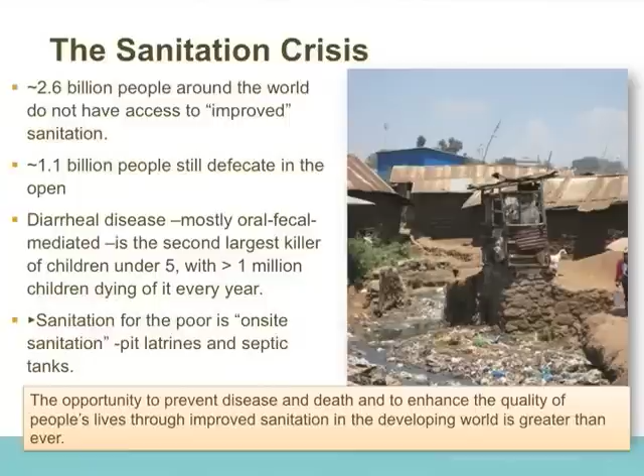So the sanitation crisis, bottom line is about 2.6 billion people around the world. There's 7 billion people in the world at the moment. 2.6 billion don't have access to safe hygiene. When we talk about safe hygiene, do I have a laser pointer here? There. This is a pit latrine. And this is the disposal mechanism for that pit latrine. Out of those 2.6 billion people, about 1.1 billion people still open defecate. That means they go find a bush and they'll go take a crap behind a bush. Okay? Sorry, I'm not going to be nice about my words here. This is how it works. So the opportunity to actually prevent disease and death through affecting sanitation on a global scale is huge.

The foundation, effectively, within our group, what we're looking at is the safe and affordable sanitation within these low-income groups. Key there is affordable. And part of the term of affordable is that we have to look at this as a business proposition. In our water sanitation group, we have 3 functions. I'm not really going to talk about the delivery models at scale, which are the change behavioral management, tends to be more rurally focused. Policy and advocacy here is where we try and influence the local governments and the major governments to actually put in good sanitation policies. Because I'm the technology guy, I get to talk about sanitation and technology, and it says tech here, so we're going to talk about that.

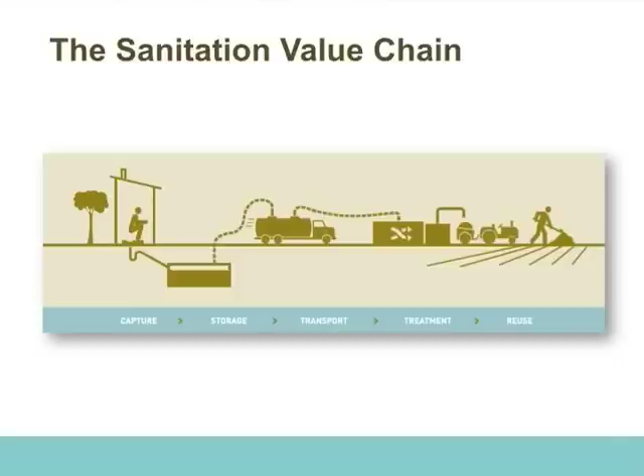Here's the sanitation value chain as we see it. And this effectively is the Reinvent the Toilet program. There is a challenge, which Bill Gates gave us, I'll talk about that in a second. Within the sanitation value chain in the developing country, you've got a latrine if you're lucky. And if you're lucky, that latrine goes to a pit where you can store your fecal material. If you're lucky, someone will come along and take that material out of the pit, and if you're really lucky, they won't drive around the corner of your house and drop it off. They'll actually take it to a location where they can process it. And if you're lucky where they process it, they do it correctly. Okay? So what I'm going to do here is talk through this sanitation value chain and what currently happens at the moment, and then we'll talk about what we're trying to do to affect that.

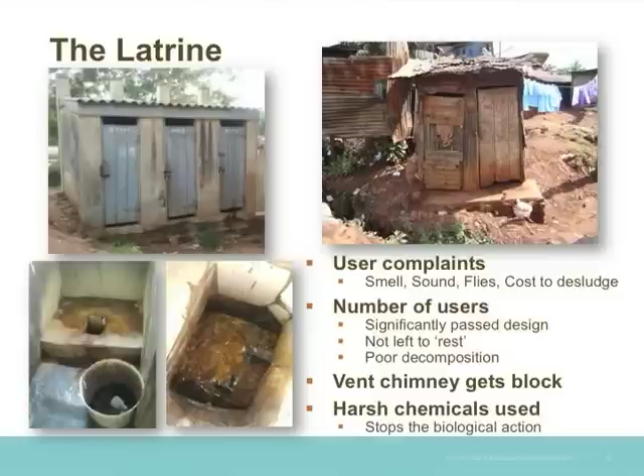The problems we have: smell, sound, flies, cost to desludge. People, when they go to the restroom over there, restroom, what a term, they don't want to smell it. They don't want to see it. They don't want to hear it. And they don't want to hear, or see or smell everybody that went before them. Okay? The cost to desludge, oops, sorry, I went the wrong way. Back, there we go.

There we go. The cost to desludge is around about $30 to $60 a year for an existing pit latrine. This is for people that earn $2 a day, if they're lucky, perhaps $1 a day. So that also means that our business proposition starts capping at $60 a year. Can we do something that reduces that $60 a year to $50 a year? Can we reduce it to $50 a year for a pit disposal? Can we reduce it down to 40? So you can see where the business propositions start to come in.

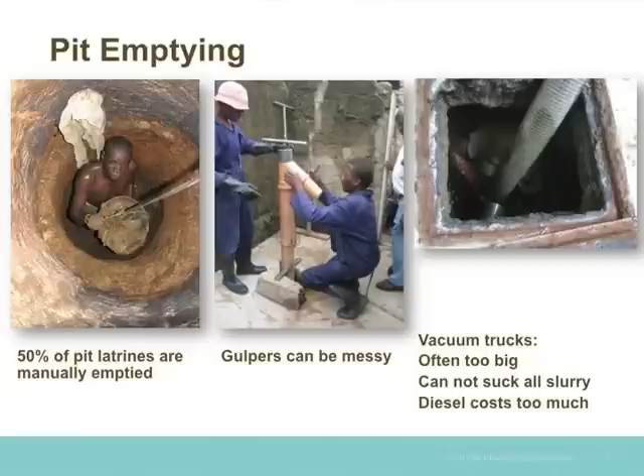Vacuum trucks themselves have the same problem with that. And what you'll actually see if you look carefully, there's a guy down in the pit, even with the vacuum truck, trying to help disturb this layer at the bottom of the pit to be able to pull it out. The other issue you'll find is the trucks are often too big to move up a peri-urban area. So they end up laying a very long pipeline to the pit, which obviously reduces the vacuum pressure as well.

And 80% of pit cleaning out is the cost of the diesel to go from the pit to wherever they're disposing it. And part of that drives the reason why they'll go down the road and they'll just dump it into a natural location rather than to a proper treatment site.

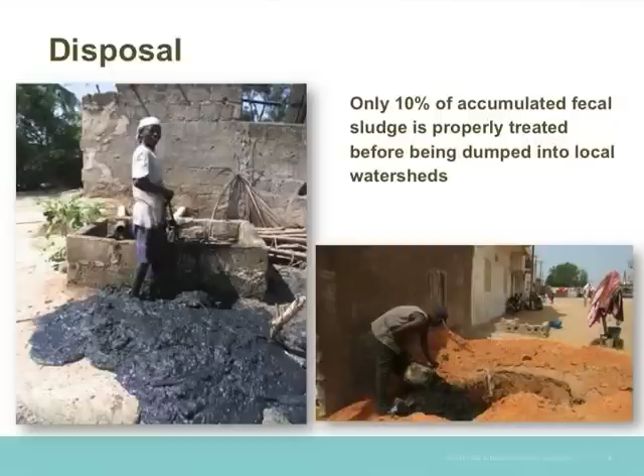Disposal. 10% of accumulated sludge is disposed of correctly in developing countries. Sometimes you'll get the pit and it's just emptied out right by that. In other situations, you'll have people just dig a hole around the side of your house, and that'll be where your fecal material goes. In fact, one situation I know of, they didn't have room in the dense urban area, so they dug a hole in the living room, and then they covered it up again.

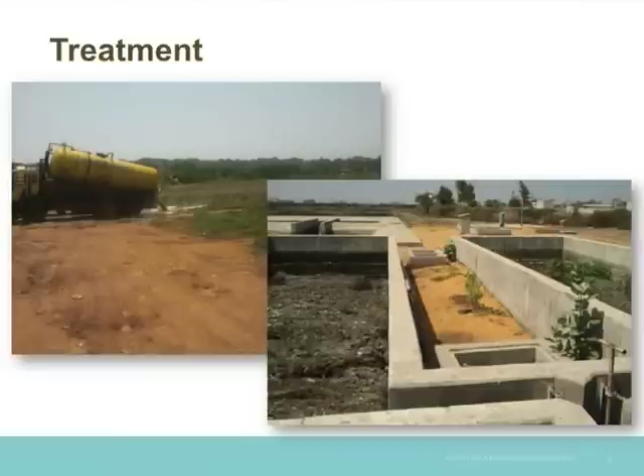We have a treatment system here which is out of Dakar, Senegal. It has some primary treatment. There's some mineral separation. It goes to drying beds at the back. It actually works very well. The problem is, the day I took this picture was halfway through the month and the local utility had run out of money, so nobody turned up to work.

Okay. So how do we do it better? And this is where we come in. First of all, we don't believe in sewer lines. And I think we saw some great numbers showing why we shouldn't believe in sewer lines in this situation. So our goal is to actually expand and improve the existing situation you have, i.e. build up a sanitation network based on what works within that system anyway, and to actually turn that into a business proposition.

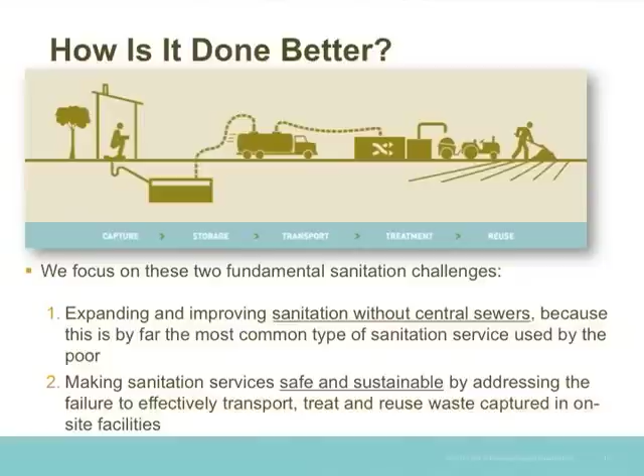When I look at this value chain, I see cottage industries at every single point. So how do we make those cottage industries into a business model, and that business model then drives the sanitation issue for us? From the latrine side, this is actually for the next images that come up. We have a project with the London School of Hygiene and Tropical Medicine.

They're looking at the actual pit latrine, and they've determined what the rate-limiting steps are within the decomposition of the organic matter in the pit latrine. What they're now doing is developing what they would call a biobomb that goes into the pit latrine, that speeds up those rate-limiting steps, and so now you can actually reduce the organic material in the pit latrine.

What that means is, instead of paying $60 a year, perhaps you pay $60 every 5 years. So now we start to see a value proposition there, as long as the additive is lower than the delta on their disposal costs.

More effective designs. In this situation here, basically you defecate on the toilet seat here. There's a valve in there that has a water seal on it. After you've been to the bathroom, you'll kick this little handle here. There's a counterweight that opens a water seal. It drops it into this container here. You would then wash your hands. That's 8 ounces of water that recreates the seal. Okay? That stops the smell, stops the flies.

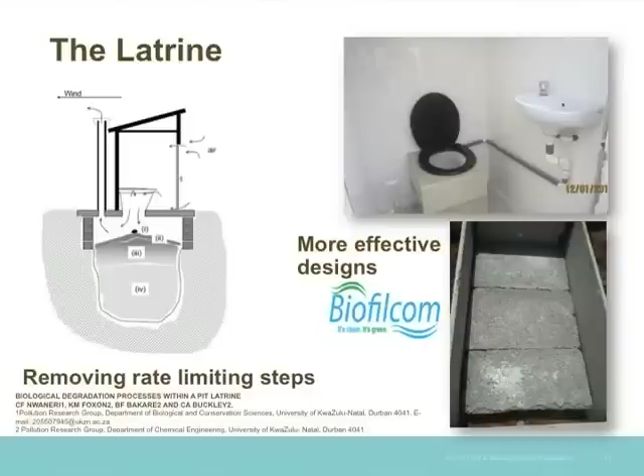Within the actual box here, we have highly porous concrete that allows us to do source separation. The urine drops down. The organic material stays on top. You separate the ammonia from the bacteria. You reduce your smell as well. After about 10 days of installation and use, they put worms in there for vermicomposting. And because it's aerobic, and because you have bugs, roaches, everything else in there, you get about a 90% reduction of the waste in about 6 days.

There's about 2,000 of these units installed across Ghana at the moment. They're about 2 years in operation, then you have to empty them out. It goes straight onto the garden. The longest one that's been installed is 6 years. It's still working fine. Okay? So it goes again to what we were talking about at the keynote at lunch about decentralized and how much you can treat this stuff on site.

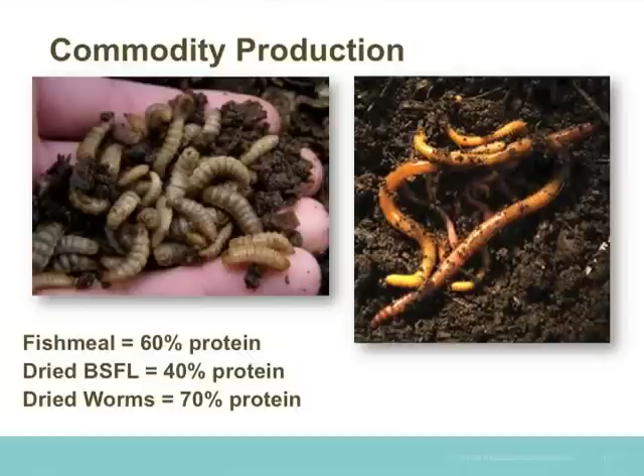Commodity production, this is my favorite slide. Okay? What you've got here, really the key is fish meal is 60% protein. You feed chickens with fish meal in Africa. It's about $1,000 a ton. Black soldier fly larvae and vermicomposting, they'll actually eat the organic material. Black soldier fly larvae are interesting. They eat the material, and just before they pupate, they crawl away from the food source, and they try and find a nice, quiet place to turn into black soldier flies. Black soldier flies are interesting because they only live for 2 days. They don't eat anything. And actually they excrete material on the food source, in this case fecal material, that deters other flies.

If we take those larvae and we dry them, we get 40% protein from them. If we take worms, we get 70% protein. The business case here is fish meal is costing $1,000 a ton. So if we start building up a commodity market here, you start to see where a business proposition occurs.

Emptying pits. This is our omni-ingester competition, and there's only a couple of pictures I'll show on the next slide because this is with for-profit vendors. We do have some IP issues involved, and so it's easier for me to just put the diagram here. The business component of emptying the pits: if you can take a pit emptying device and fully empty those pits, and instead of doing 1 pit in an hour, you can now do 4 pits in an hour, you're starting to see where there's a business proposition there.

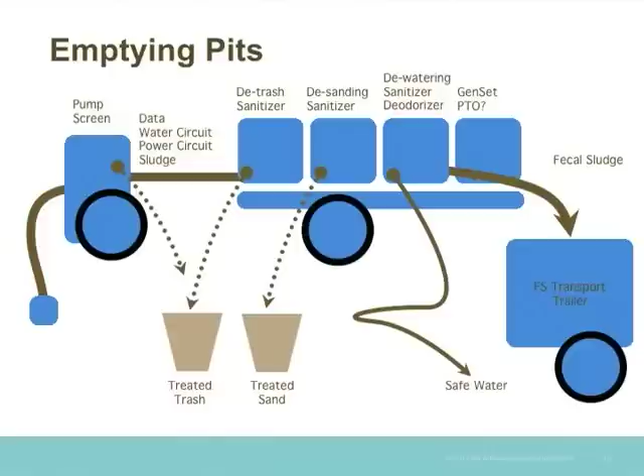If you also take that material and you detrash it, you desand it, and you dewater it, instead of being able to get 1.5 pits onto a truck that will be trucked away, you can now get 6 or 7 or 8 pits onto a truck. Remembering that 80% of the cost is diesel and transportation. So now we're allowing a much reduced cost for emptying a pit, which can be translated onto the client, but also we allow the pit emptiers to make more money.

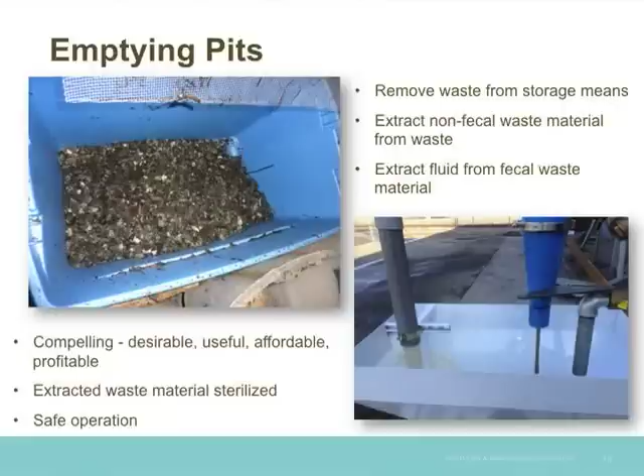All right? So within emptying the pits, we've already started moving on our phase 2. We've got our detrash component set in place with a couple of companies. We're looking at our dewatering system set in place. And we're moving forward now into how you sterilize this water on the fly. It's all on a mobile platform, and that's where we're moving to the next stage.

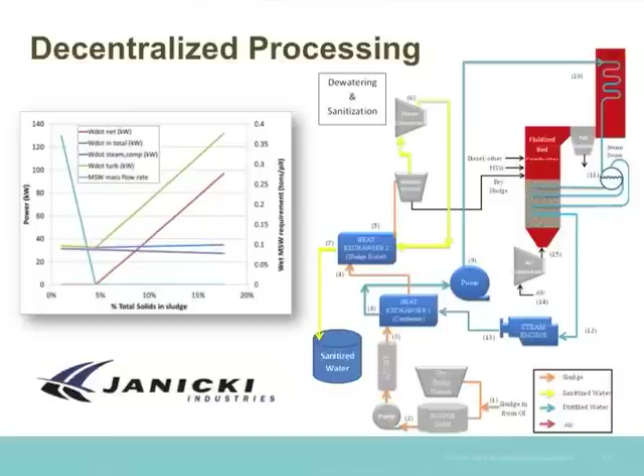However, the key there is we can augment the solids with solid waste, and you start to get an excess energy output to the system. So part of our deal with Janicki is, hey, this is good theoretically, build it, show us it works, and then we'll believe and we'll start to propagate the technology.

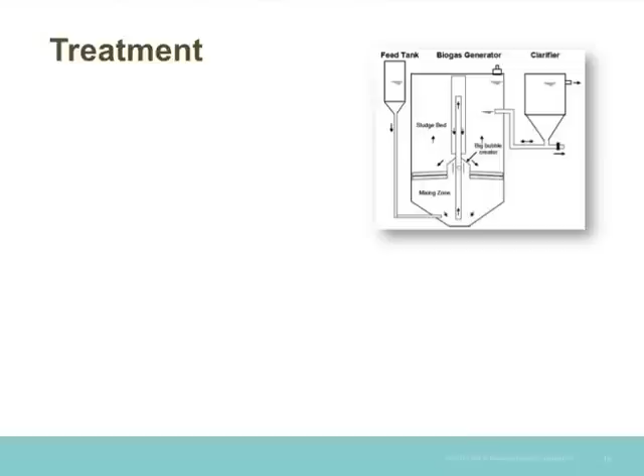On the treatment side, there's a smattering of things that we deal with here. Part of the value proposition on treating materials is how do you actually sell most of that energy or biogas out to the people that are going to use it? So in this situation, we funded somebody to figure out how to remove the stir bar from the biogas reactors. What they're doing here is essentially using a bubble cavitation system to create the turbulence that they need for anaerobic digestion. We remove that stir bar, we remove that parasitic cost. That means that people can sell more and create a better business delta.

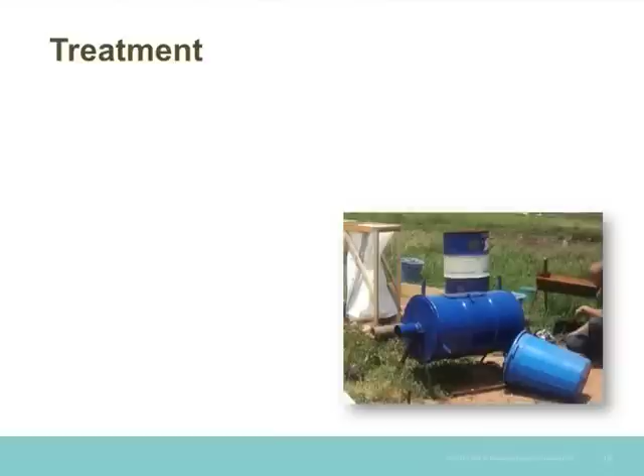If we look at this situation here, we're looking at just a simple 55-gallon drum that's being turned into a biochar reactor. Rural situation, anybody can use it. You basically pick up your fecal material. Rechar are a very good example of someone we're working with on this. You have an insert in your pit. When you defecate in your pit, it fills up the insert. You pick it out. You drop it into your biochar reactor. You make your biochar, it becomes fuel.

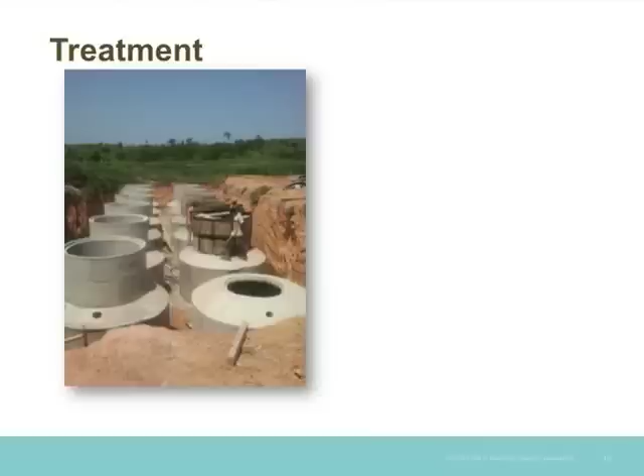This one is up in Kumasi. What we're doing here is we're making biodiesel from fecal material. So about 10 or 12% of fecal material is fats and lipids. So we're converting that directly. What will happen here is in the first two reactors, we'll have a direct conversion to biodiesel.

And the other reactors are fermentation systems, and the goal there is you actually break down the rest of the organic material into amino acids and reconstitute more lipids and proteins. The lipids then can be converted back into biodiesel as well. So we get enhanced biodiesel recovery.

If anyone wonders if that is possible, there was a Japanese researcher, I think 2 years ago, they did exactly the same thing, reconstituted proteins and made meat from fecal material. I don't think we'll be serving it here, but it's the same mechanism as that, except we're looking at biodiesel as an end product. And then we're also doing things in the area of bioelectric cell systems. We're looking at microbial fuel cells, more along the high technology side of things.

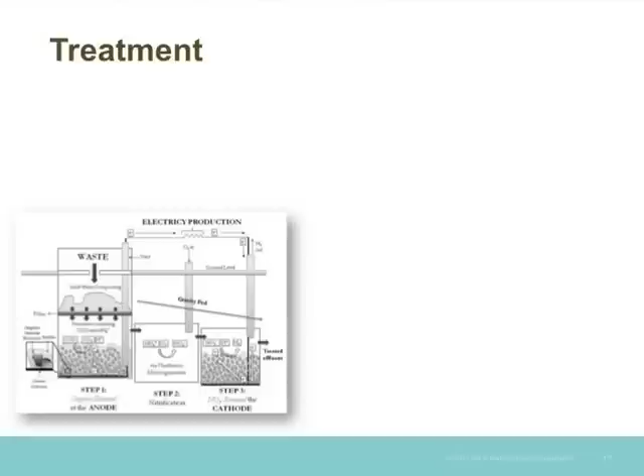Within the Reinvent the Toilet challenge, this is a specific challenge that was put to the WASH team by Bill Gates. Bill Gates is a very technology-focused person, as you would imagine. What he wanted to do is say, okay, let's take this whole sanitation value chain, collapse it into a black box that can process everything at the location that you defecate, so that there's no waste product. Doesn't mean there isn't a byproduct, but there's no waste product. And any water that comes out is going to be potable. Big challenge, right? You don't give away easy things when you're Bill Gates, right?

The goal here is what do we get out of it? Do we get subcomponent technologies that can be applied to something else? Does somebody just amaze us, like with cell phones? We've been talking about cell phones a lot with people out of the presentations. In Africa, they were going to lay a lot of landlines, about $1 trillion of landlines. Along comes a cell phone. No one thought it would take off in Africa because it was too high tech. Suddenly, it's everywhere.

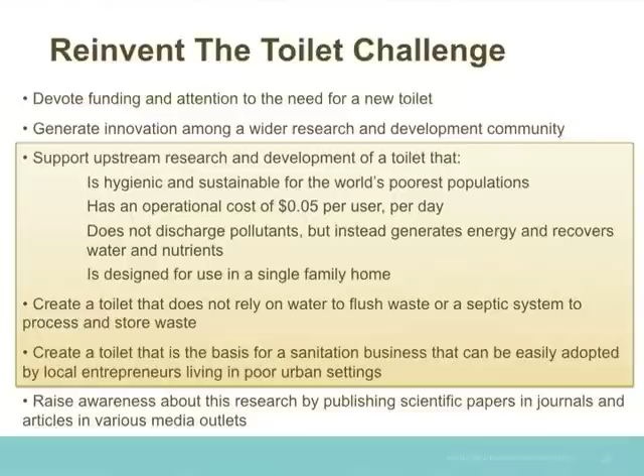And this, by the way, is about 5% of our funding. It's not our own thing. Everything else takes up the majority of it. But the key here is the operational cost of 5 cents per user per day. And that key is based on basically the $30 to $60 pit latrine disposal cost. So can we make this standalone unit, put it in basically a latrine site, and you will pay less for that than you will pay to have someone come and empty your pit latrine?

People sort of look at this strangely because they think that's a really high-tech thing. Well, effectively, the first round of 8, and we're about to set up awards for another 13. But the first round of 8 really looked at things like pressure cookers, hydrothermal carbonization, barbecues, smoldering, and microwaves, University of Delft.

So what we're looking at is not high-falutin technologies that no one's ever thought of. We're looking at how do we adapt common things that we do every day and put it into a field in the sense it works. So the one that I've pulled out for an example, especially with the time here, is the barbecue. The University of Toronto presented a smoldering system. And within the smoldering system, you would defecate.

There's a separation of liquids and solids. It goes down to a sand filter. They're developing an active sand filter. You would hand crank, and it would scrape off the top, bring it back up to the wet solids. They've modeled the whole drying regime along the conveyor belt, which moves, by the way, every time you lift up the seat. It hand cranks that conveyor belt along. So it dries along here.

It drops into the smoldering site, and they've actually proved that you can fully smolder based on technology that's designed to remove coal tar from soil. You can smolder the fecal material, and the sand from that then goes back into the sand filter. The one thing they're struggling with a little bit at the moment is the UV disinfection, because they're having to use materials that are already in the field, so it tends to be low-pressure UV. So they're modeling the low-pressure UV and what configurations they need to manage that with.

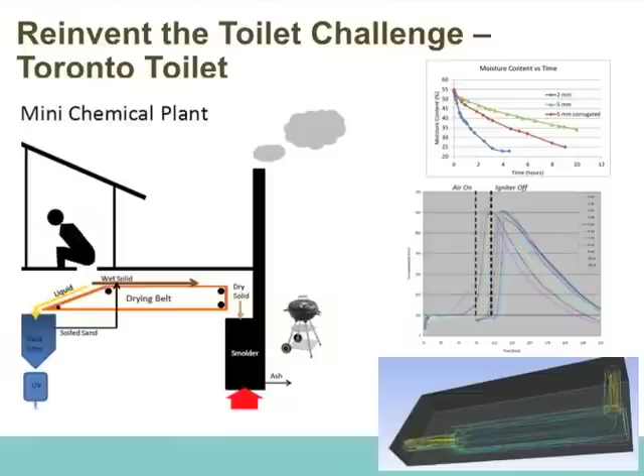This here doesn't have a byproduct. What we're seeing at the moment is it's penciling out that it would be below 5 cents per user per day. Other things we're looking at: in the case of University of Delft, where they're doing microwave systems, they're making syngas, they're pushing it into a fuel cell. That fuel cell is enough to run a lamp, so the kids can be educated in the house, or the wife, and I'm sorry, it is the wife, can do more crafts so they can sell them on the street.

There's other situations, for example, the hydrothermal carbonization, the pressure cooker model. That then becomes a fuel. The nice thing about hydrothermal carbonization, you don't have to do the water separation or any drying beforehand. And the goal there is to actually change the chemical form so you can get good water separation afterwards, because it literally becomes a filter aid. But then you can take that filter aid and use it as a fuel afterwards.

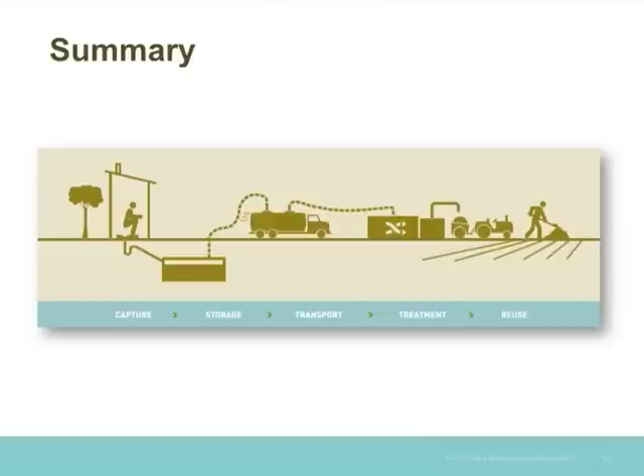So just to wrap up, this is my summary slide. The goal here is to make a business at every point. And our ultimate goal in the ideal world is to create a value product at the end, whether it's biogas, whether it's electricity. Most likely it'll be biogas because of the cooking environment. Make this so profitable that people would go back and say, I'm going to buy you a toilet, because fecal sludge just became a commodity.